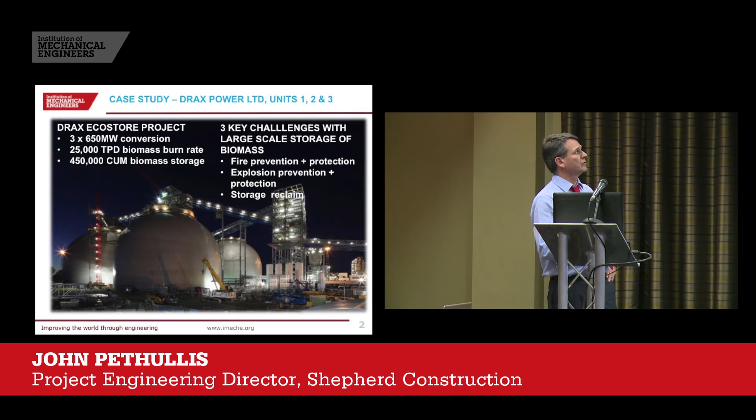So the Drax EcoStore project, Peter's talked about that this morning. I won't go into detail with this, just a brief summary. That's 3 times 650 megawatts, and what's very interesting is 25,000 tonnes per day of biomass that will burn with 3 units. We're currently burning 2/3 of that - that's an awful lot of biomass to handle in a day, an awful lot of trains coming in and out. And 450,000 cubic metres of biomass storage, or 320,000 tonnes. So that very large facility, that very large project, presents an awful lot of challenges.

So what I've done, I've just concentrated on 3 key challenges that we can talk about in more detail. First of all, of course, fire prevention and protection. We've heard a lot about CO monitoring - biomass evolves CO all the time, it off-gasses huge amounts of CO. The real question is, can we differentiate between normal off-gassing and the onset of combustion? So what I'll do is show you what we're doing at Drax at the moment. It's not the only way of doing it, but it's how we're trying to differentiate between what's normal and what could be a fire.

Explosion protection, again, on such a large scale, is pushing the boundaries, and I want to talk to you about what we've done there. Explosion prevention and fire prevention are very closely linked for obvious reasons, but the explosion protection is quite different - it can interact with the fire protection, a point that Declan made this morning. I'll try and cover that one, Declan - we did consider it.

And then with such a large storage, reclaim is obviously potentially quite challenging. We've heard a little bit about the vibrating floor - I've got a short animation that will show you how that works. So we'll cover those three areas, the 3 key challenges.

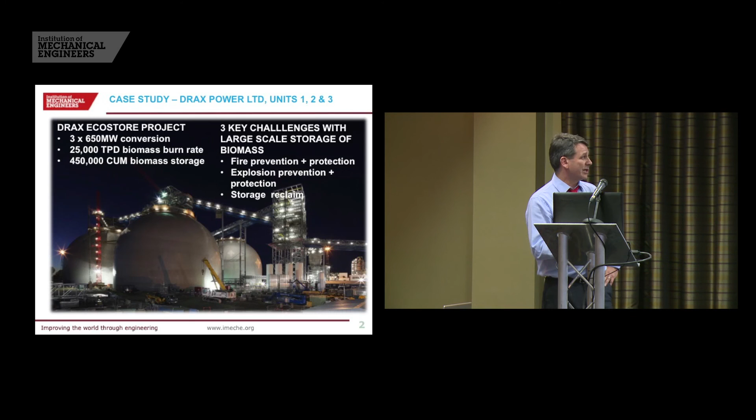Fire safety - I apologise for using a picture that you've already seen. The sad truth is I've got quite a collection, so I'm spoilt for choice in terms of biomass silos on fire. This one's brand new, I think, but there are plenty of others. So it weighed very heavily on our considerations in the design.

It's well known that pellets do self-heat during storage. One issue we've got is just how much do they self-heat? How do you predict it? How do you measure it? There's some quite well-established basket tests, isothermal basket tests, that are not particularly suited to pellets - I think that's fair to say.

But in any case, think about the extrapolation. If we extrapolate a basket test - 25 millimetre cube, 40 millimetre cube, 50 millimetre cube - we're going to extrapolate that by a factor of 9 billion, if my calculations are right, to get to 112,000 cubic metres. Is that credible? Would I be comfortable using that as a basis of safety?

Not really. Now, we were very lucky. Peter mentioned that Drax started this journey 10 years ago, and certainly for 2 or 3 years in advance of Drax commissioning this biomass facility, they've been stockpiling biomass around the country, gradually building up their supply chain, because they've got to match the supply chain to their consumption, so they needed a bit of a buffer. So we had access to some full-scale stores, some larger stores.

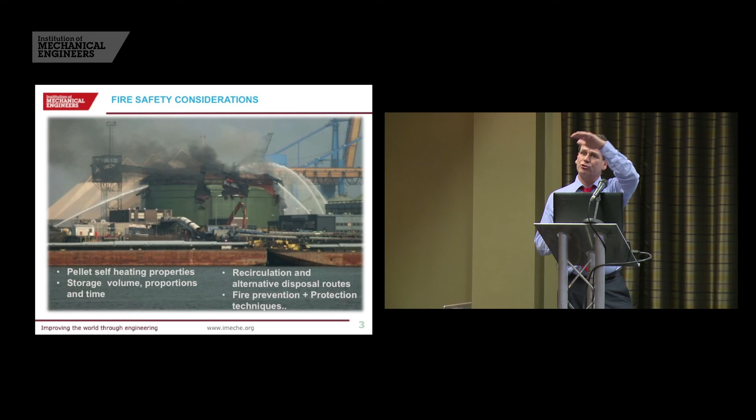They did get some self-heating, and they did tend to mitigate that by moving the product. I think that demonstrated to me that the heating effect can be very localised. You can see how localised it is when you see mushrooms appear on top of the stockpile, where moisture is being driven up like a candle, and the pellets are expanding due to the moisture. You actually see a mushroom form above the hotspots. So these nests of heating product are perhaps broken up in the handling operation. Yes, you introduce a bit of oxygen, but you also break open the protective cocoon, because it's such a fantastic insulator. So recirculation was something we seriously considered at Drax, but we chose not to do - we don't feed dome to dome.

Why not? Well, because we can empty a dome - 112,000 cubic metres - in 24 hours. So we can actually burn it. I think if you detect the problem early enough, the preference is to get rid of it. Provided the downstream handling equipment can cope - and we can cope up to about 100 degrees C - the preferred option is actually to burn it. And if we do get the odd hot load notified by the ports, we can bypass the storage and go straight to the boiler, avoiding storing hot product.

Alternative disposal routes is something we thought long and hard about, because nearly every one of the pictures I've collected of these silo fires features something like that. If it's a concrete silo, it typically features a pecker with a fire brigade knocking a hole through the side of the silo. If it's a steel silo, it's typically somebody with a cherry picker and angle grinders cutting a hole through the side of the silo.

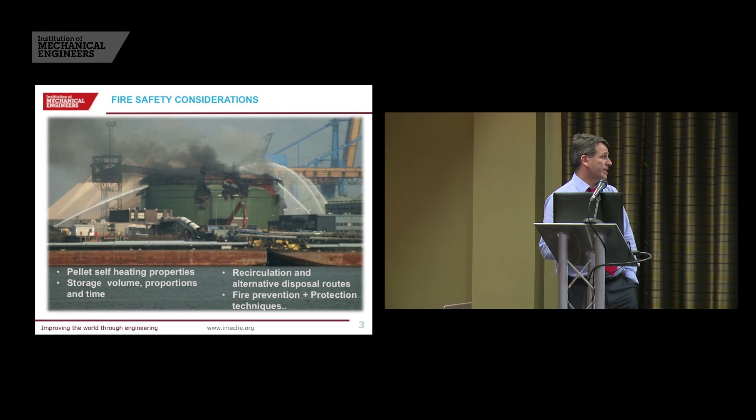So then we'll have a look in a bit more detail at fire prevention and protection techniques. The protection techniques often rely on detecting the fire early enough. How do you detect a fire in a store? How do you detect self-heating? That's what we'll be looking at.

In terms of fire prevention, a key preventative measure is tramp removal, tramp metal in particular. We have various stages of removal. We start off with a coarse screen at the rail unload facility. We then go through some rotary disc screens where we bring the size down, and then pass it through overband magnets.

These again presented a challenge - 2,800 tonnes an hour separation, not easy. We had to split the stream into two to keep it to a workable size. A point to note is even at 1,400 tonnes an hour, an overband magnet doesn't have a fantastic efficiency with relatively small nuts and bolts. It'll probably pull out the bigger pieces of tramp, but there will still be tramp metal getting through the system. So you do need to keep this in mind.

Monitoring on the conveyors really is a key part of the Drax philosophy. Looking back through the history of some silo fires, I think a lot of them could have been mitigated, if not prevented, if they'd avoided transferring burning or glowing embers from one inventory to another, whether that's ship to silo, silo to silo, or store to day silo. So we put a huge amount of effort into monitoring on the conveyors.

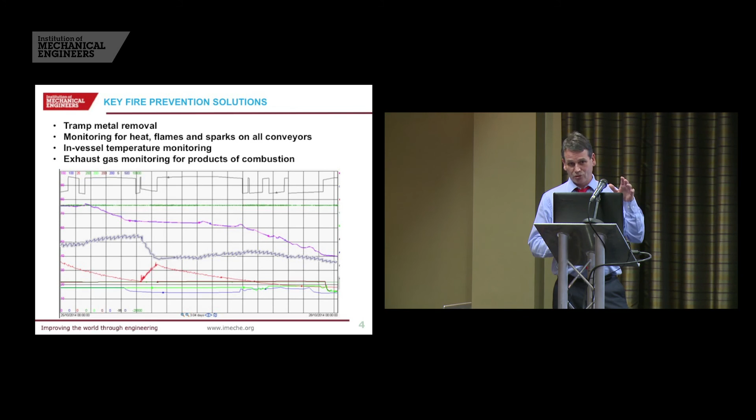But what we can do is average the temperature of each dome, and we use that in conjunction with the exhaust gas monitoring. So we monitor for oxygen depletion, carbon monoxide, carbon dioxide, methane, and half a dozen other fairly exotic gases I can't remember the name of, but I wrote them down - aldehydes, phenols, etc. The problem with all these gases is they're all present during normal off-gassing, and they're all present during combustion.

So how the hell do you differentiate between the two? How do you know what's good? I'll try and explain that. Just a little bit more information on this slide - this is the actual dome contents, and it's the average.

This is actually the carbon monoxide level. This is the oxygen depletion. So what happened there? Well, we actually didn't fill the dome because you can see the level was dropping, but we did run the fans. We have some fans on top of the domes that allow us to change the atmosphere.

So chances are we're doing some maintenance on the dome roof, and whenever we're doing maintenance on the dome roof, we run the fans to draw any leaking carbon monoxide or nitrogen away from the conveyors. But that pattern is quite interesting.

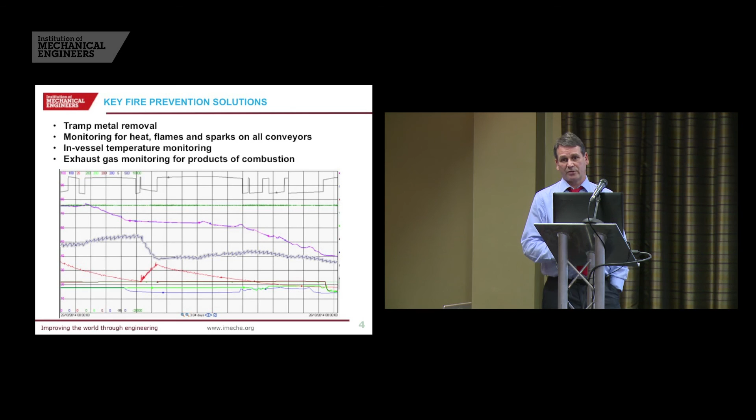What we'll see is whenever we fill a dome, the oxygen content will rise inevitably. We've got the valves open and we're pouring in new pellets, bringing new oxygen. But we can generally keep within 10% oxygen. So we're typically running at 95% nitrogen, 5% O2, and even without rotary valves on the inlet, which are just not practical at 2,800 tonnes an hour, we can actually keep very close to being below the explosion limit for biomass.

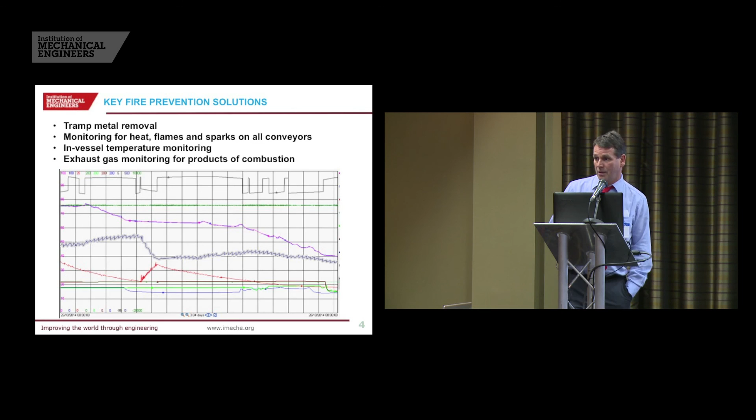In terms of actually developing some solutions, Drax made it very clear to us that these domes were for long-term storage. Yes, we can empty one very quickly - you can empty one in 24 hours - but they are the replacement for the stockpile. With a coal stockpile, they've got months of security. With a dome, at normal burn rates, they might have 13 days for 4 domes. So you can see how hand-to-mouth they are with the ports, the supply chain and logistics. But they do want to keep the products in there as a long-term store.

We know already that the critical temperature for those domes, I don't know whether it's 60 or 65 degrees, but it's certainly very close to the likely delivery temperatures. So that influenced the decision to store under inert atmosphere. The domes are maintained at 95, 96% nitrogen, the remainder being predominantly oxygen.

We generate that nitrogen on site using a pressure swing adsorber, shown in the photo there. That's backed up by a liquid nitrogen system, so you can see the liquid tanks, and the next slide shows the evaporators. The liquid nitrogen is evaporated using atmospheric evaporators and then pumped into the domes through the bottom. We'll look at that in more detail. That's done pretty much on a continuous basis.

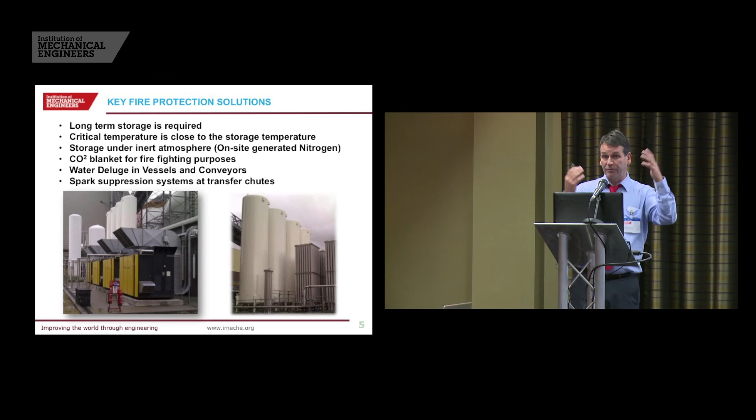But we did also think about what if it comes the other way around - what if we have an explosion that blows the top off the dome, an explosion vents, and then maybe it doesn't nullify our fire protection systems, but it certainly makes them work a lot harder. Nitrogen going in through the bottom should be relatively unaffected in the bulk. Yeah, of course the headspace is going to be pure air, but actually pumping the gas through the base is still going to be beneficial.

If I've had an explosion and lost the roof of the dome, then the chances are we're going to hit it with a water deluge, and that should still be active with an open top. And again, CO2 - yeah, that might be pretty much useless. I suspect the updraft from the flames would whisk the CO2 away very quickly. But we did consider that scenario, though the most likely one is a fire leading to an explosion. And self-closing vents just weren't practical on this scale.

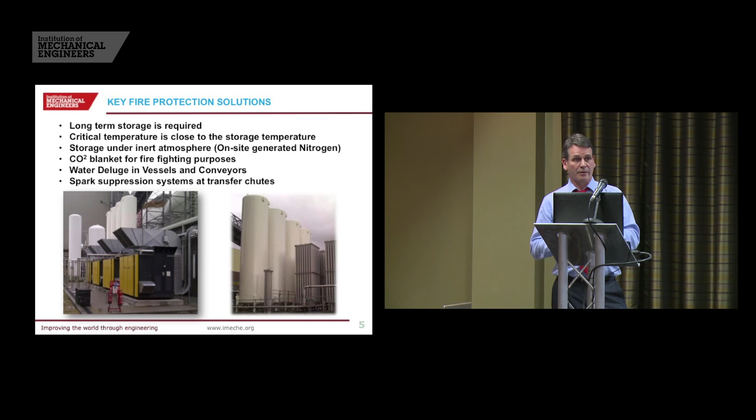We talked about spark detection at every transfer. We actually have spark suppression at key chutes, and the key chutes are the ones that enter the vessels. So this is really our last shot at trying to stop a glowing ember dropping into a vessel. We've tried for heat detection, we've tried for flame detection. At the last chance as it goes into the dome, we have a fire suppression system that, touch wood, hasn't operated at the moment.

So a closer look at the nitrogen distribution system.

Rob mentioned this morning segregation during filling. These are core flow stores. That's a fact - we empty 85% by gravity, then reclaim 15% by operating the vibrating floors afterwards. So they flow in core flow, and you can see here slightly different hatching.

I guess I could dream. I could dream, but maybe one day.

It's not too clear, but we anticipated those would be in the flow zone, good clean pellets. But we certainly anticipated that in the non-flowing zones we would get significant fines increase, the primary mechanism being segregation during filling, this rolling segregation Rob talked about. So we'd get a significant increase in fines here and here. That was a concern, because introducing gas at the bottom of the dome, what I don't want it doing is taking the easy route and just going up through the flowing channels, bypassing the very areas that are likely to self-heat.

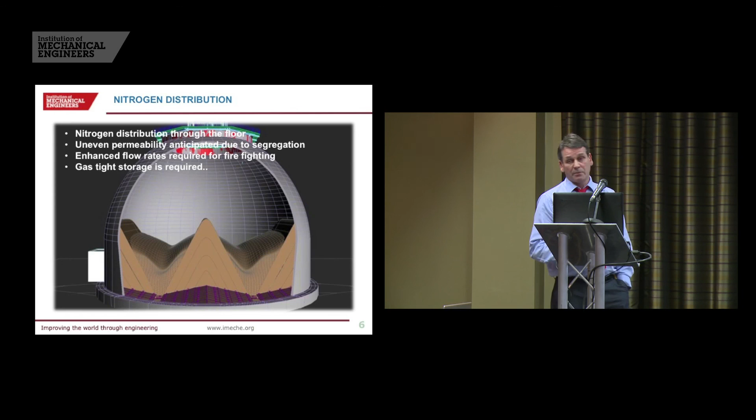So we had to look a lot more closely at nitrogen distribution - more of that in a second. The nitrogen generators generate 2,800 metres cubed per hour of 96% purity, and that's certainly proving enough to serve 4 domes. We actually cycle round the 4 domes, and we can hold those 4 domes comfortably at 4% O2.

But that isn't felt to be enough for firefighting purposes. In terms of what is enough for firefighting purposes, the best we could do, and I would draw your attention to it if you're not already familiar, is the Nordic codes and Henry Persson's textbook, Silo Fires - probably as up-to-date a publication as there is, backed up by full-scale silo tests, albeit 100 cubic metres, not 112,000 cubic metres, but at least there's a bit of science got into there.

What that indicated was that we could be looking at significantly higher gas flow rates in the event of a fire. So the system is designed to go up to 12,000 metres cubed per hour for ultimate fire protection, and we do that by using the standby liquid nitrogen system as well. The distribution system is designed to take the PSA generated capacity and up to 9,000 cubic metres taken from liquid storage through the evaporators.

That's obviously something that shouldn't happen too often, which in turn brings its own problem, because you've got to negotiate a contract with your gas suppliers to give you a very short-term response - 9,000 cubic metres an hour of liquid nitrogen - but you probably never use it. So it must be a tricky old discussion, that one.

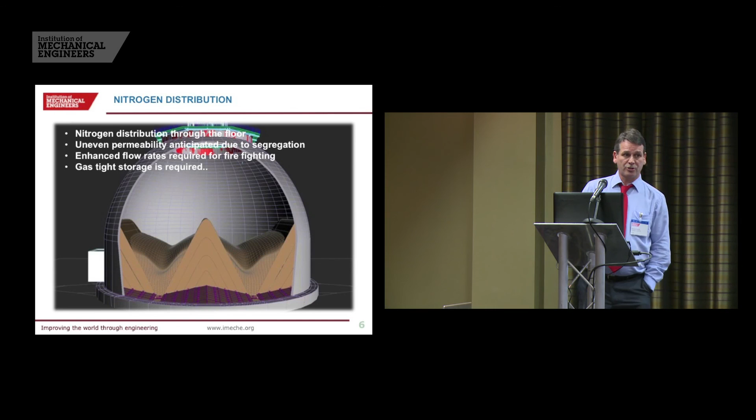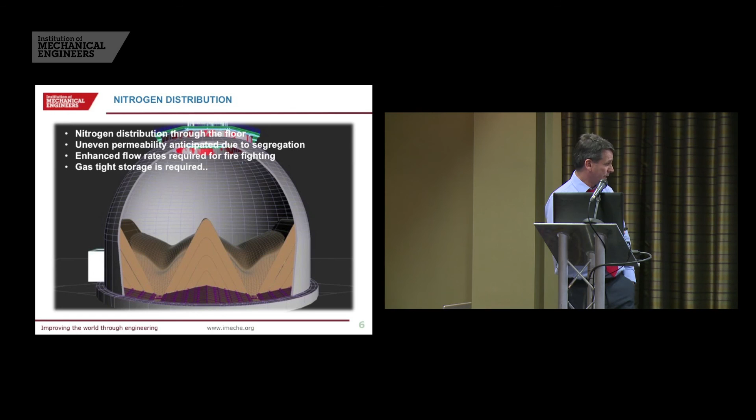Now clearly this decision to use nitrogen as an inertant to keep it there all the time during storage, because of the size of the store, meant we needed a gas-tight store. So we thought about silos, we thought about flat stores. It pushed us towards domes. Silos are very difficult at this kind of quantity we'd need. Flat stores - we just couldn't see a way of making it gas tight. A dome is inherently gas tight, at least it is until you cut the top off, but we'll come on to that.

We also did a lot of work with Air Products on oxygen re-entering the dome. We had a big worry about what would happen when we filled the dome - we've gone to the trouble of filling it with nitrogen, it's taken us 48 hours to get there, and now it's in production, we're going to have to keep opening the slide valve and putting more pellets in.

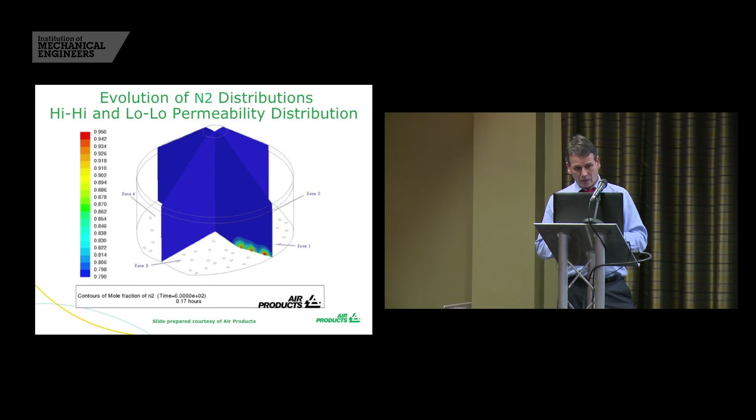Back to off-gassing - there's a paper out there in the public domain. It's based on lab-scale off-gassing work, and the gist of the paper is that off-gas rates are entirely predictable. It takes a few days to stabilise - fresh pellets liberate more carbon monoxide than older pellets, but once they've aged it does stabilise. Depending on temperature it takes longer or shorter to reach that stable position, but there's a predictable CO rate linked to different temperatures.

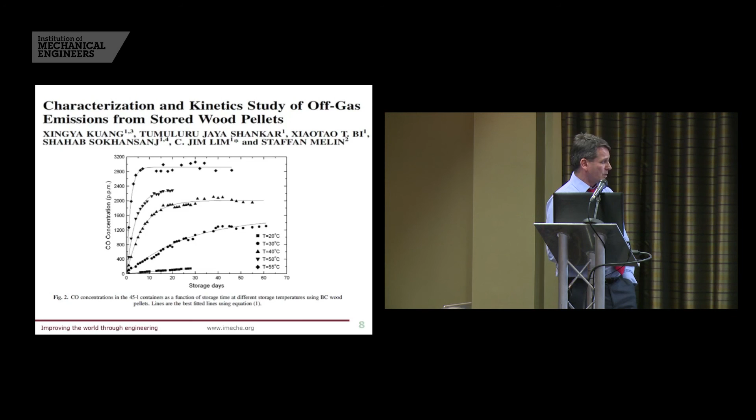To predict the level of CO that is normal off-gassing, you need to know the mass of biomass you're storing. The domes have a sophisticated 3D scanning system dealing with complex flow patterns - there are 16 outlets on a W-shaped floor. It's filled centrally and we reclaim almost individually from the feeders at variable rates. The operator can intervene to bring the dome down fairly level, but inevitably you get some fairly deep flow channels. This system gives us an average of the contents and matches very closely within 2% of the inventory measure - we've been measuring what we've burnt and trains coming in daily, and we had a 2% guarantee to achieve with this system, and we are there with it.

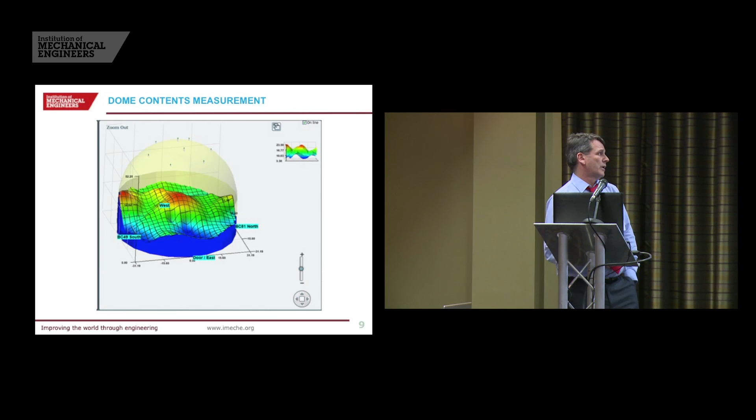If you locked the dome down, closed the valve at the top and bottom, the CO level will just keep going - you'll never really know what a good level is, you'll just have to use the gradient, the rate of change. But if you aspirate the dome with a given amount of gas, it's not difficult to predict at different temperatures what the ppm level should be in the dome.

In this example, if we had 55,000 tonnes in the store and the biomass was at an average temperature of 60 degrees C, taken from those multi-point temperature sensors that might not be accurate for an individual hotspot but give us an idea of the dome temperature, that would predict a 1500 ppm background level. That's extraordinarily high you're probably thinking, but that's real, that's normal - we actually routinely run at 1000 ppm in the domes.

But remember, this only works if you're aspirating the dome - if you've got some air movement, or gas movement rather, through the product. So what we've been doing for the last year really is validating these graphs. On a daily basis we take measures of the ppm reading in the dome - we've got 8 cells measuring this per dome - and we're plotting it against these graphs, and I'm quite impressed that these guys got it about right. We're getting excellent correlation with the lab scale predictions of what the background levels should be.

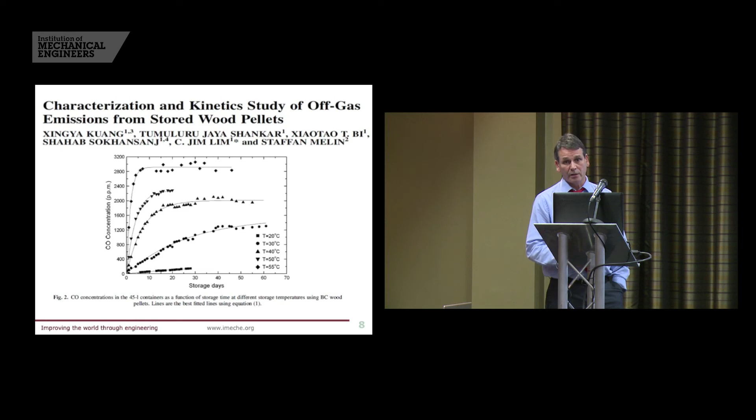So what that allows us to think about is smartening up our alarms. It's not difficult nowadays with SCADA systems to build in these kinds of graphs as almost lookup tables. The operators do it at the moment - they know that if they've got 55,000 tonnes in the store and the average temperature is 60 degrees C and they had 2,000 ppm, they'd be in trouble, and that would trigger some of Drax's procedures to start thinking about controlling a fire. So we can replicate that with the control system.

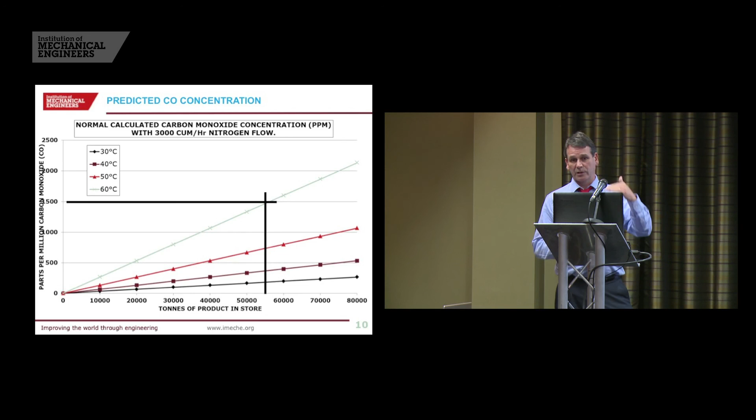We're not quite there yet - we've been spending a lot of time validating these graphs, but we do see flatline CO at predictable levels for a given temperature and a given mass. As soon as you get that, you've got the possibility of generating alarms - you can start to see the excursions quite clearly.

So moving on then from fire protection to dome explosion protection, it almost broke our hearts to take these lovely domes and then break the tops out, but it had to be done.

I was aware of a dome in Korea which didn't have any explosion protection. It probably had all kinds of other mitigating measures, but ultimately it didn't have any explosion protection. It was handling coal, pulverized coal. It did explode, and there is no dome anymore. It was a total loss, and you can imagine that that would be catastrophic.

So we had to do quite a lot of soul searching about whether we could use the inerting as the basis for safety to prevent an explosion. We're usually less than 5% oxygen in the dome. Well, that wouldn't support an explosion. It's a very good thing to do. It's mitigated the chance of an explosion. But could I put my hand on my heart and say it will always be 5% O2 and not stray up to 8, 9, 10, 11% during filling?

We couldn't. And also, DSEAR has got an obligation to mitigate the effects of an explosion, not to prevent it, not to protect, but to mitigate. And if you did have an explosion in an unvented dome, it would be catastrophic. It would be like the Korean dome.

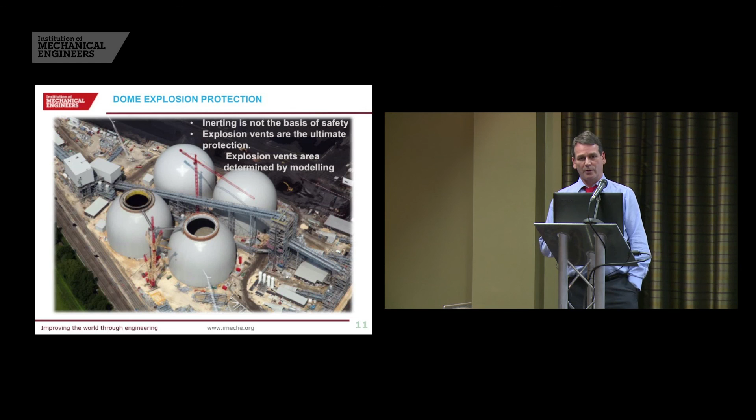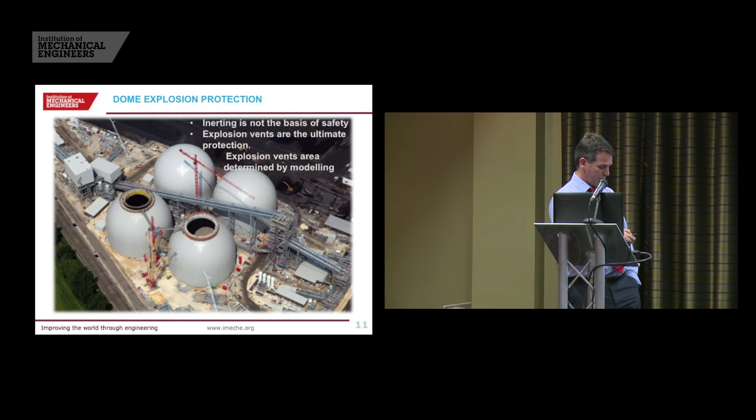So we turned to Gexcon and used their DESC modelling, which Paul has already mentioned this morning. He also used it at Immingham.

This was used to - I'm sorry David, I've just called it DESC modelling. I know it's moved on, it's no longer called that, it's now called FLACS, Dust Explosion Simulation Code. This was a model, a code that was developed with EU funding, with the HSE buying into this. So I think it's a reasonably well established model, or way of modelling a dust explosion.

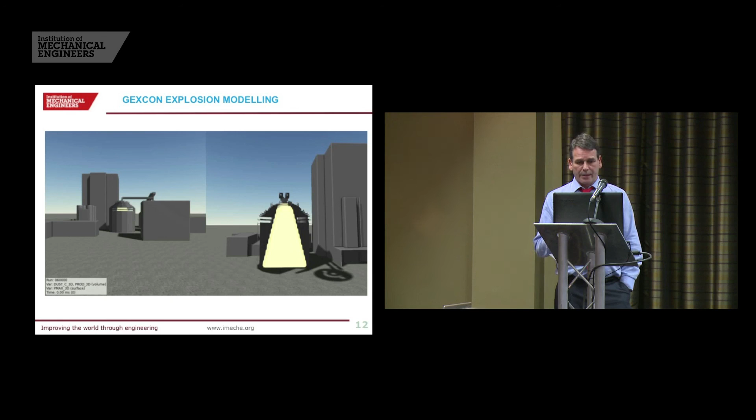I'll see if I can get this one to work. Looks very pretty, looks very effective, looks very interesting. What I was more interested in was the output from this.

Of course, it will help us with predicting the explosion pressure. For the domes, it's about 0.8 bar, doable with a dome, perhaps challenging with a conventional silo, but certainly doable with a dome.

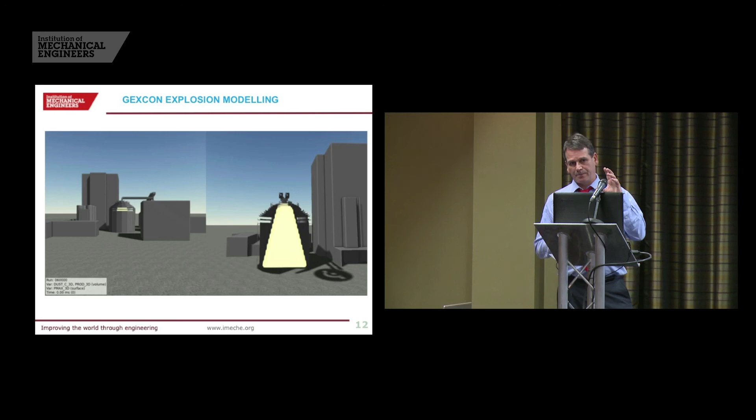What was really interesting for us was the explosion path modelling. So this is the flame front and the pressure waves. The domes are fairly well away from the station. You've seen that from the aerial pictures that Peter showed you.

But the boiler distribution silos are right in the heart of the station. We've got explosion vents that if we point them up, it's ideal, but we're pointing them straight at the head house. Point them sideways, we're pointing them at other process plants. Almost certainly the bunker house or boiler house are going to come in within distance. And we need to design the equipment that could be impacted for those loads. It's as simple as that.

Can be done. For your head house, I'm sure you'll have had some interesting structural issues with that cladding and the cladding rails, but it can be done, can't it?

But could you do it without this modelling? I don't think so. If I had to resort back to the old design codes where it told me what the pressure was at a given distance, I'd have no idea of what it would be to the side of the path, and clearly the pressure is like a bubble.

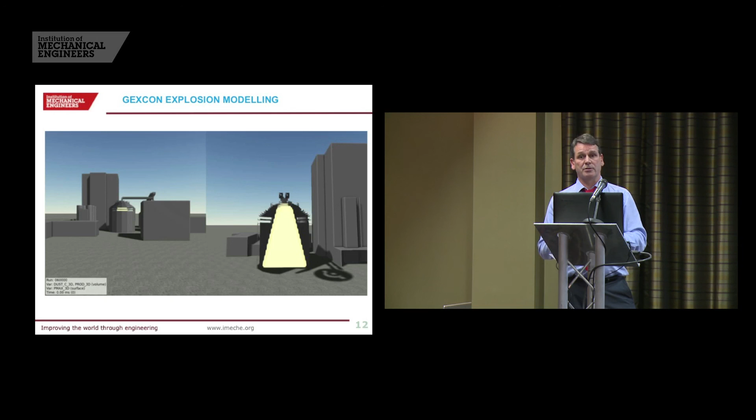It's not a fan-shaped explosion vent, it's a bubble, and it can have quite far-reaching effects. So the Gexcon modelling was invaluable for the design of the dome and the BDS silos in particular, and also the dust handling plant, the dust filters and the dust storage silos.

We did consider proprietary rupture panels for the domes. We need something like 400 square metres, so you can imagine there's a real challenge in getting rupture panels on there, being able to maintain them, being able to get at them, trying to avoid cold spots, because we were also well aware of the risk of condensation, and we'd got fantastic insulation in the dome body.

What I didn't want to do is compromise that on the roof. Very difficult to detail a steel roof with proprietary bursting panels and still maintain a level of insulation without cold spots at all the junctions. So we decided to design our own frangible roof using off-the-shelf composite panels. So this test here will show you, takes a few seconds to run, so I'll start it running first.

This is one of the composite panels being tested by Gexcon at their facility in Norway. This is something like a 2 metre by 4 metre sheet, which the roof's constructed from, composite panels with aluminium cladding. It gives you an idea of what KST 200 bar metre per second looks like, using a gas of an equivalent KST, as wood dust is around 200 bar metre per second.

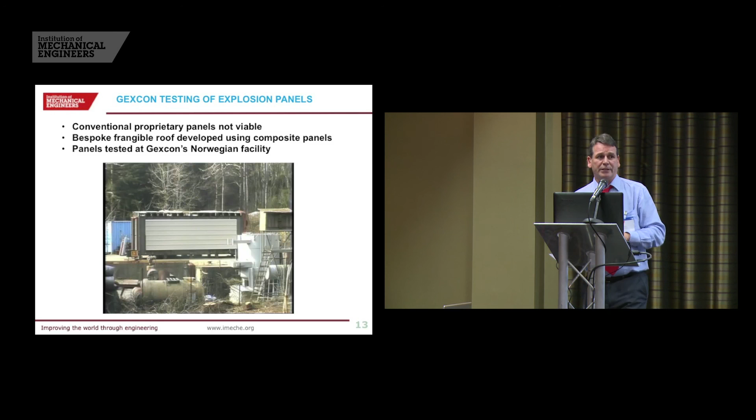So, in conclusion, why choose domes? Why not use a flat store? Why not use multiple silos? I think storage domes certainly fulfil the need for large volume storage and large volume gas tight storage, and that was really important to us for fire prevention and helping mitigate a dust explosion. They're also inherently strong, even when you cut the top off them. So it was possible to increase the design strength, push that up to 0.8 bar, which brings down the necessary explosion area to sensible proportions. So that combination of gas tightness and a very strong store certainly favoured a dome.